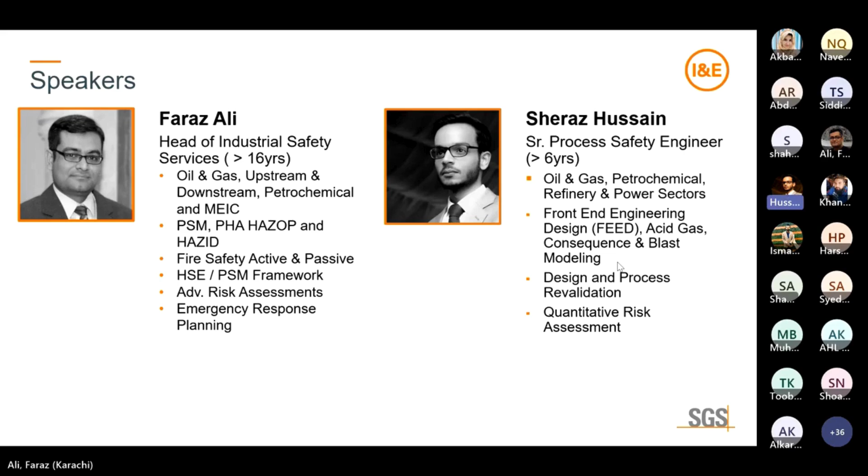Right, so a quick summary of introduction of what we will learn together and how we'll be proceeding. First, as the name expresses, this session is about process safety management. Then we'll cover why we need process safety management within our organization or area of operations. We'll have a quick introduction of process safety management, its relation with international standard ISO 45001, along with key information on some major process safety management systems deployed globally.

Then we'll move onward to one key element of the planning phase, process hazard analysis, which is a key element of the process safety management system. Then we'll quickly go through qualitative, semi-quantitative, and quantitative risk analysis. Before heading to your questions, we'll have quick takeaways from this webinar, and then we'll be available to answer your questions or queries in the chat box.

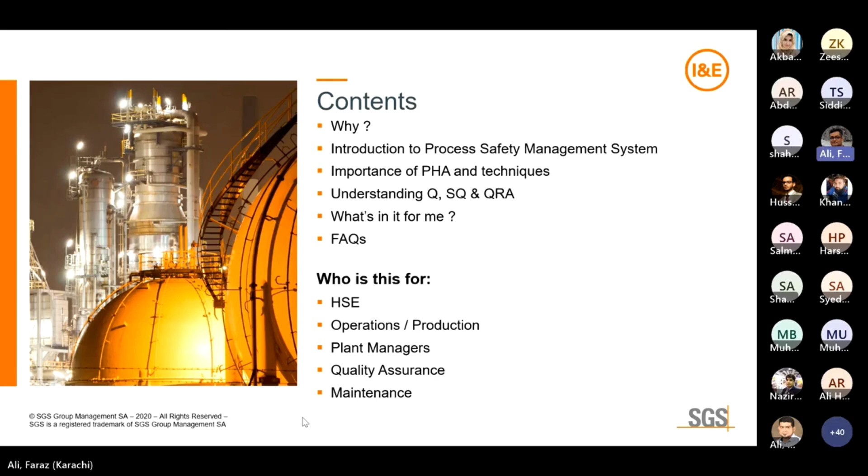So quickly, with a brief start, why do we need a process safety management system within our organizations? Basically, process safety management exists to avoid or mitigate the risk of unexpected release of toxic or hazardous substances, where we either manufacture or store them within our organization. Some key high-level or catastrophic incidents have led organizations to understand and get alert for process safety incidents.

For example, the BP Texas refinery explosion caused around 15 worker deaths, injuring 180 workers, and caused several damages to refinery assets. Some elements of the process safety management system were missing: pre-startup safety review was missing, mechanical integrity was inadequately deployed, consequence modeling was not adequately performed, and unattended audiences were present during the startup of one of the ISOM units. So you can see some key minor elements resulted in a very catastrophic incident.

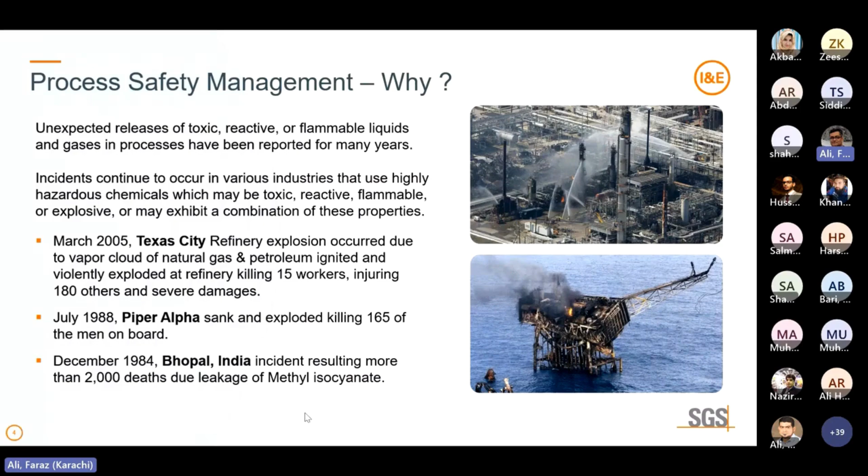Before jumping into process safety, let's have a quick look at what process means to us and how process safety is different from conventional or occupational safety. Process means either we are handling hazardous substances, chemicals, toxic or flammable materials, or cryogenic liquids.

Either we are involved in the storage of such substances, manufacturing them, handling, utilizing, or disposing of them within our operations. These processes are considered part of the process. For the sake of definition, any group of interconnected vessels, or separate vessels located such that highly toxic chemicals could be involved in an unexpected release, follow a single process approach.

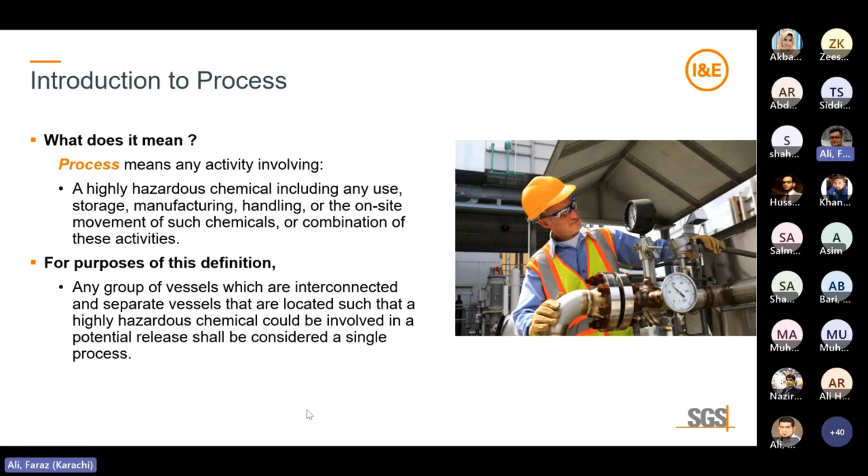So what is the key difference between occupational health and safety and process safety? When we talk about safety, we normally think of the safety of individuals, so personal safety and individual occupational health and safety link together. There is risk of, for example, slips, trips, and falls in every workplace. The key element that differs personal safety from process safety is that personal safety has a high frequency or high likelihood of occurrence, but results in lower severity risks.

Process safety is the blend of engineering and management skills coupled with leadership focus on preventing or mitigating catastrophic risks and near misses, particularly structure collapse, explosions, fire, and toxic release of hazardous substances within scope. Most of the time, process safety incidents are low in frequency, but they result in a high catastrophic result, which may manifest as fire or explosion affecting the nearby community, the people working within the plant, the boiler, or the pressurized vessel containing toxic or hazardous substance.

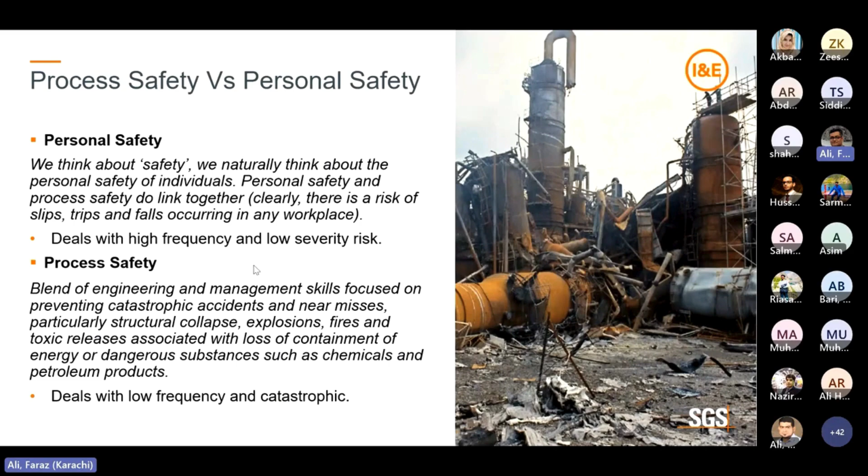When we say hazardous substance, we mean any substance which is toxic, reactive, or flammable. So basically process safety management, or the process safety management system, is applicable to the following key industrial sectors.

Since I have participants from various industrial sectors, process safety management systems are usually applicable to manufacturing industries, specifically chemicals, petroleum refinery, petrochemicals, transportation equipment, and other chemical industries involved in chemical manufacturing, storage, terminals, and depots, etc. Similarly, for fabricated metal products, other affected sectors include natural gas liquids, farm products, warehousing, and so on.

These process safety or safety management systems are also deployed in the electrical power generation and distribution sector, as well as in gas sanitary service and pyrotechnics or explosive manufacturing, where they are involved in manufacturing, storing, or even disposal of hazardous or toxic substances.

One US regulator, OSHA, regulates that organizations specifically dealing with such hazardous or toxic substances around more than 10,000 pounds, almost similar to 4.5 thousand kilograms, must be regulated via OSHA regulations of the process safety management system.

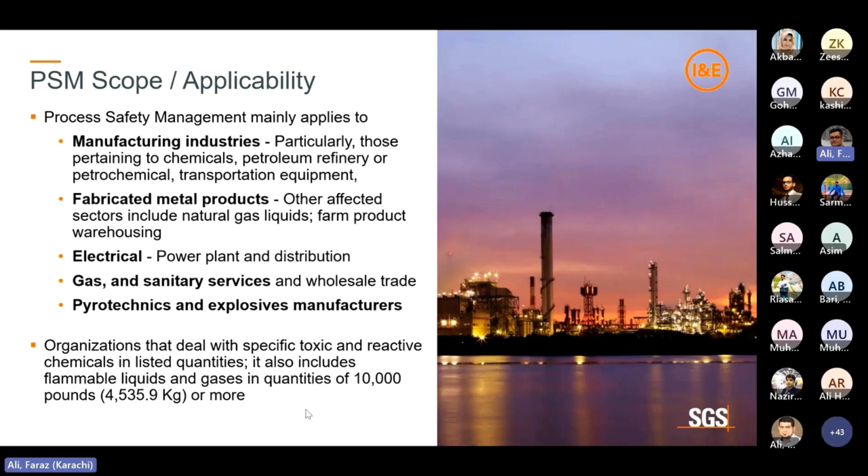So that's all regarding what process safety is, why we need a process safety management system, what a process safety management system is, and whether, as an individual working in any organization, I need process safety management. I've already explained the answer in this slide pack. So let's have a quick look at the key elements of process safety management. How does it look?

Similarly to our conventional occupational health and safety management system, process safety management again begins in a similar way. We will be reviewing these requirements along with ISO 45001, how it compares and how it weighs against ISO 45001's key requirements.

Basically, complying with the Plan-Do-Check-Act approach, this management system starts with process safety information. I'll explain later how these elements proceed, then it proceeds with process hazard analysis, where my colleague Sheraz will explain more in detail, operating procedures as part of the Do stage, hot work permit system, emergency response planning, mechanical integrity, PSSR, training and competency, management of change, incident investigation, contractors, and in the Check-Act stage, compliance audits and management review, etc.

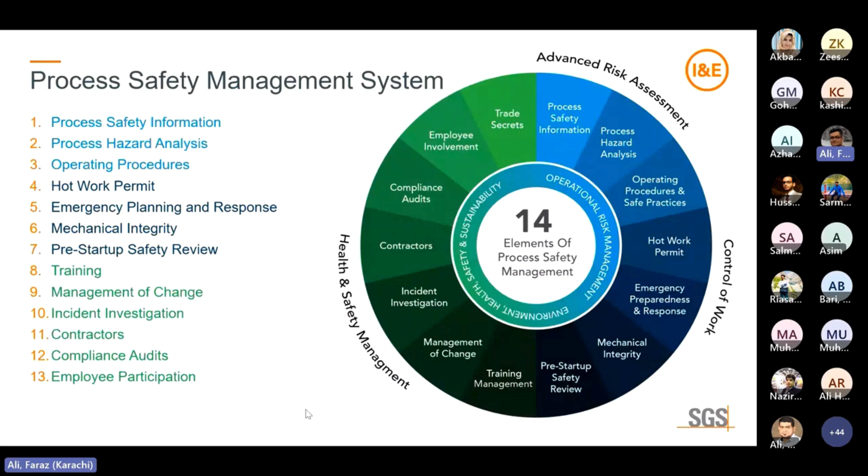By combining operational risk assessment along with environmental health, safety and sustainability, this basically comprises three key elements. Number one is planning, which is a clear statement from management including advanced risk assessment. Another is control of operations and control of work. And the third part is regarding the management system, which complies with continual improvement.

One of the key important process safety management elements, when compared with standard elements, we have, along with DuPont process safety management, which is a well-known and very renowned process safety management system. Most organizations are either deploying it or already part of the DuPont process safety management system. Apart from the difference between standard process safety management systems and DuPont PSM, the key difference is based on 8 elements.

The more complex the process or operation you have, whether in refinery, petrochemical, manufacturing, or a similarly highly hazardous process like an oil terminal or gas pipeline, the key difference in elements becomes important.

Management commitment, integrated organization structure, goal, objective and planning, safety personnel competency, effective communication, management of change, facilities, quality assurance, coupled with mechanical integrity or asset integrity, and the last one, management of change of personnel.

As DuPont has done with standard process safety management, they have split some key elements, for example management of change. With standard process safety management, we have only one management of change process, but with DuPont process safety management, we have three management of change processes. DuPont has split the MOC process into three: facilities, personnel, and processes.

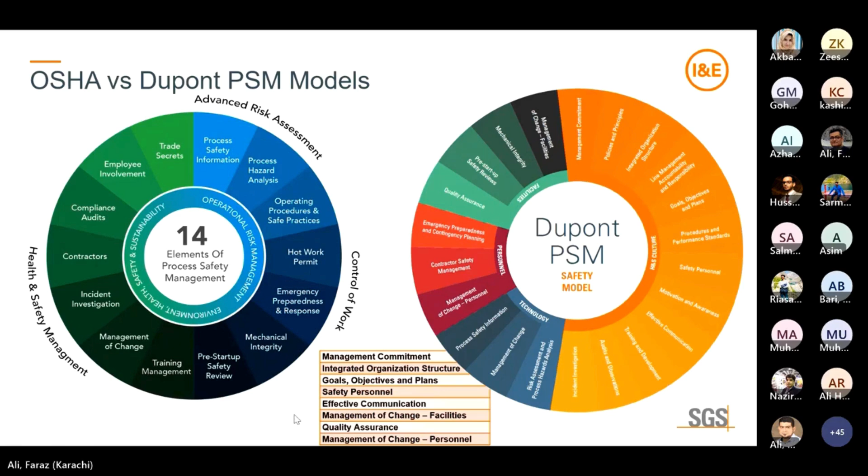Let's have a quick look at the Energy Institute. In European Union countries, there is a high demand or requirement, and they are regulated by Energy Institute requirements for process safety management high level framework.

Along with the same theme of PDCA, they start with process safety leadership, continue with risk identification and assessment, then advanced risk assessment or risk management, and the last one for continual improvement: check, auditing, and understanding the requirement of management system review or management review.

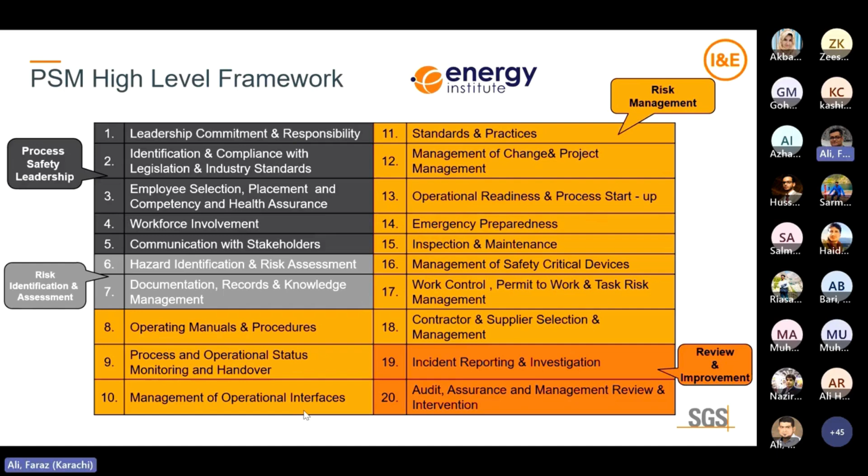So these two are the key high level process safety elements. Let's have a quick look and assess them against the ISO 45001 requirement.

Again following the theme of PDCA, process safety management system demands strong leadership. We have seen this in OSHA, in DuPont PSM, and in Energy Institute. Good leadership is essential before deploying any process safety management, whatever the applicable or regulatory requirement is.

That part is again covered under 45001 leadership and worker participation. As we've seen, worker participation is involved in the OSHA standard as well, and it explicitly explains hazard analysis, which is part of the planning phase, and we'll review in detail.

This planning, or PHA as we normally call it, process hazard analysis, differs across risk assessment techniques categorized under qualitative, semi-quantitative and quantitative risk assessment. Where do I need qualitative risk assessment? Are my existing risk assessments sufficient for my particular process, or do I need further advancement into semi-quantitative or quantitative risk assessment? So basically the process is similar: hazard analysis, quantification of risk, risk mitigation, and then looking for opportunity.

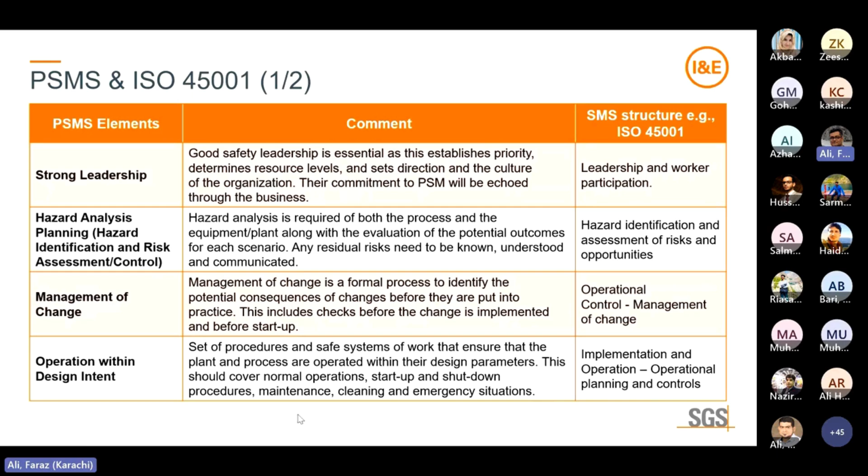Design intent is also part of implementation and operational control if we compare with ISO 45001. So on the extreme left side is the process safety management system elements, and on the extreme right is ISO 45001 key requirements, for an organization that wants a continual improvement system of process safety management.

Competence management, once again, starts with training need analysis coupled with training plans, competency assessment, and then continual improvement for each process plant operator or person involved in operations, maintenance, and research and development.

Control of contractors: we're all aware that most of the work in the process industry is done by contractors. In some organizations, more than 60% of operations or jobs, even during shutdown, are done by contractors. So control of contractors is a key element, and this is also covered under the operations section of procurement in ISO 45001.

Asset integrity planning, risk assessment and control covers the safety critical devices which are responsible for the safety of personnel, plant, and the nearby community. If their failure can result in leakage or spillage of toxic chemicals used, deployed, or produced within our operation, those devices whose failure could result in loss of containment of hazardous substance include relief devices, emergency shutdown systems, alarm systems, or sensors, etc.

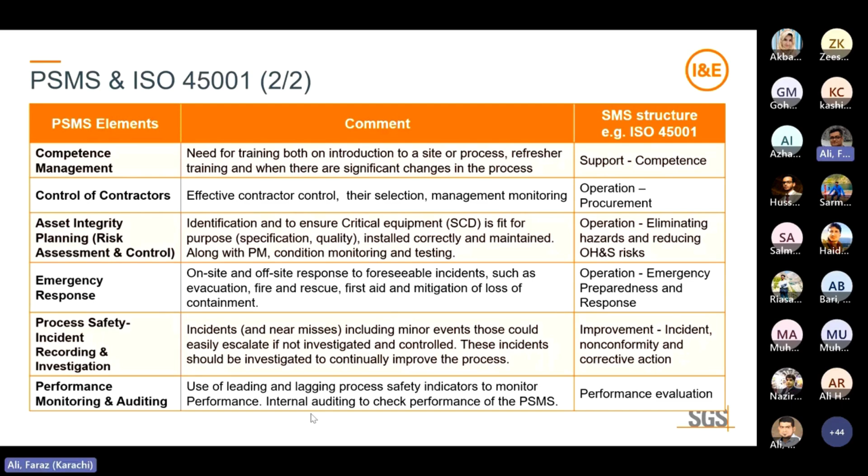As I said, the planning phase requires continual improvement of the whole management system. This is a key requirement of ISO 45001 or any management system, that they need continual improvement within the system. So this is all regarding the process safety management system and ISO 45001.

Here we have 18 different frameworks of process safety management. When we talk about frameworks, basically they are simple elements which are reorganized. Some are coupled, some are split based on the toxicity or based on the complexity of the process.

For example, if we talk about any terminal whose key operations are to perform filling of tanks and then decanting with the help of lorries, and the toxic or flammable fluid is transported via tank lorry, the operation is quite simple. There is no chemical reaction involved. Simply filling and decanting of tank, and then transportation of these toxics may require simpler process safety management.

Compared to any organization responsible for chemical manufacturing, for example polyvinyl chloride (PVC), or polyethylene terephthalate (PET), and similarly other complex refinery operations where we have certain isom units, for example hydrocrackers and other lighter hydrocarbon refineries.

One of the highlighted ones with the orange color are the key well-known process safety management systems. For example, 14 elements of OSHA, 20 elements of Energy Institute, similarly 12 elements of Chevron, and the earlier 14 elements were also adopted by Dupont, usually named process safety and risk management. Later on, Dupont further conducted advancement in its elements, and now they have become 22 elements.

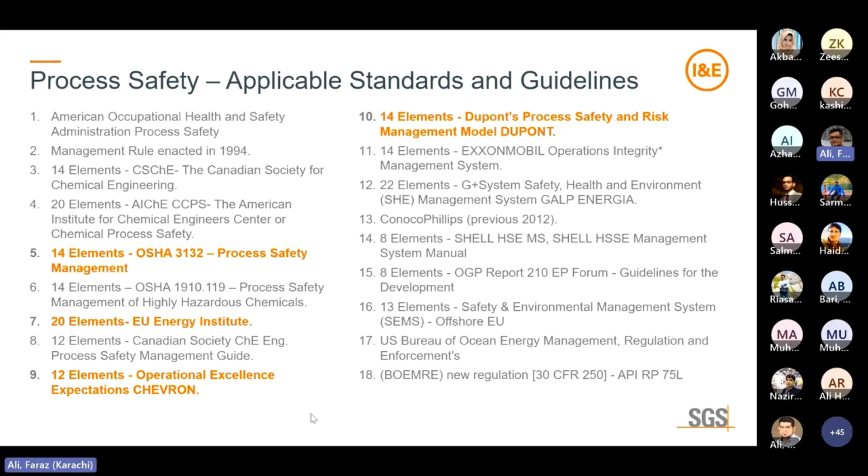Let's talk about PHA, the second element of process hazard analysis, which is part of the key activity, part of the planning phase of any process safety management system. So what is PHA? It is a thorough, orderly, systematic approach to identify what hazards are associated with the plant and how these hazards are evaluated with frequency or likelihood, and after conversion into risk, then evaluating risk and deploying key measures to mitigate those risks.

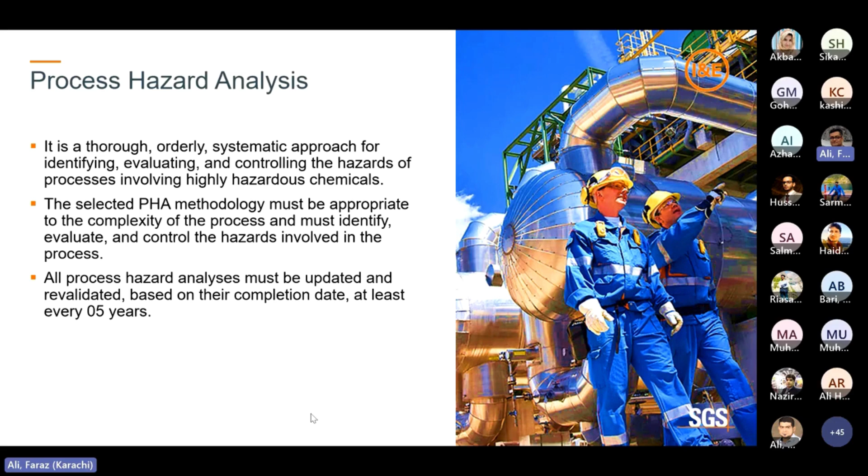Some of the key techniques deployed as part of PHA: number one, and the simplest one, is what-if analysis, hazard identification or risk register development during the design phase; HAZOP study during design, during operational phase, or during any key level management of change; failure mode and effect analysis of packaged units, similarly fault tree analysis or any other appropriate equivalent methodology, for example event tree analysis.

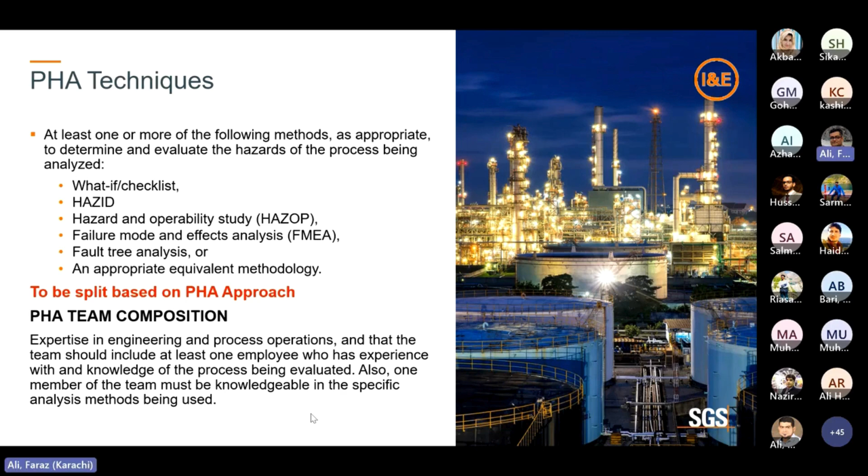So basically, how the PHA team is comprised and how it is done by the team: the PHA team normally comprises process engineers, design engineers, operation and maintenance staff, along with an independent person who does not have any sort of business or financial stake with the organization. This gives any organization an edge to truly identify the hazard, truly evaluate the risk, and provide guidance on how the risk can be mitigated and the operation or process can be made safe.

So, risk assessment approach.

The risk assessment is normally split into types. Normally the risk assessment deployed in our offices is called qualitative risk assessment, because our operations are a bit simple and they do not have any complex reaction or higher hydrocarbons or toxic chemicals within our operation.

So the risk methodology usually involves a good decision maker. For example, for qualitative risk assessment, we normally identify the frequency of the hazard identified, evaluate it against certain severity, and categorize it into low, medium, high. Then we start deploying our controls, and reevaluate what our existing risk is and what our future plans or roadmap are.

To further mitigate risk, similarly for semi-quantitative we go further to extend what the higher risks are and to what extent they can harm our people or the group of people involved in such processes. And for quantitative risk assessment...

The answer is when we have certain complex processes, the level of estimated risk again coupled with its proximity to the limit of tolerability. Similarly, the higher the complexity of the process, the higher the quantification we need to conduct for that risk assessment. Like in our offices, where we are surrounded by lower potential risk, we normally conduct a qualitative risk assessment. But when we talk about refineries and petrochemical plants involved in manufacturing or production of hydrocarbons, toxic chemicals, and hazardous substances, we usually deploy higher risk or extreme quantitative risk assessment.

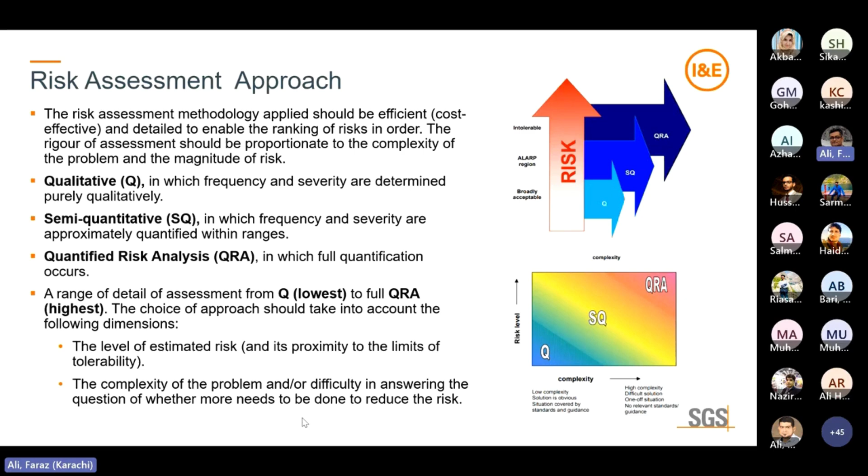So before I hand over the floor to my colleague Sheraz, he will be explaining in more detail some of the key techniques of PHA which are normally deployed to mitigate those risks within the area of operations. Thank you, Shiraz.

Thank you so much, Mr. Faraz. As you guys are aware of the potential workplace hazards and their consequences of causing injuries, deaths, and financial losses, a safety plan shall be developed and deployed by understanding the hazards and their consequences to the plant. For that purpose, we have several techniques, as my fellow has explained.

Let's start with HAZID. A HAZID is a common structured technique which identifies hazards at an early stage of the project. Hazards may relate to process or non-process sides, including manual handling of chemicals, transportation, as well as process hazards including the release of toxic chemicals, flammable gases, explosions, etc.

The main benefit of HAZID is that it identifies and gives a clear picture to management for the decisions to be taken for risk mitigation, and that ensures that our project overall will ensure employees' safety. Moving on to the next slide, HAZOP.

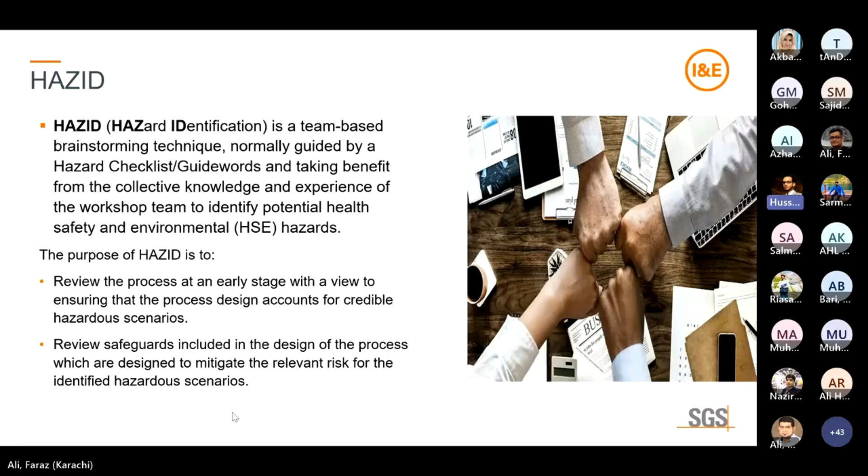In place, when we have done hazard identification and identified different risks, those risks are basically considered in HAZOP. HAZOP is particularly focused on identifying and evaluating the hazards related to the process and operability of a plant, and it's also a structured approach.

The goal is to identify and deploy appropriate safeguards, or first to evaluate what safeguards are available, and to deploy certain measures that are feasible and will reduce the risk to an acceptable level.

It's basically performed using guide words, which enable a multidisciplinary team ranging from the process side, the mechanical side, and the operational side. They are guided by guide words which take into account the parameters and the deviation from normal operation, and this enables the team to move in a focused direction and question rigorously for hazards that may happen, and to assess the plant's safety and evaluate its safeguards.

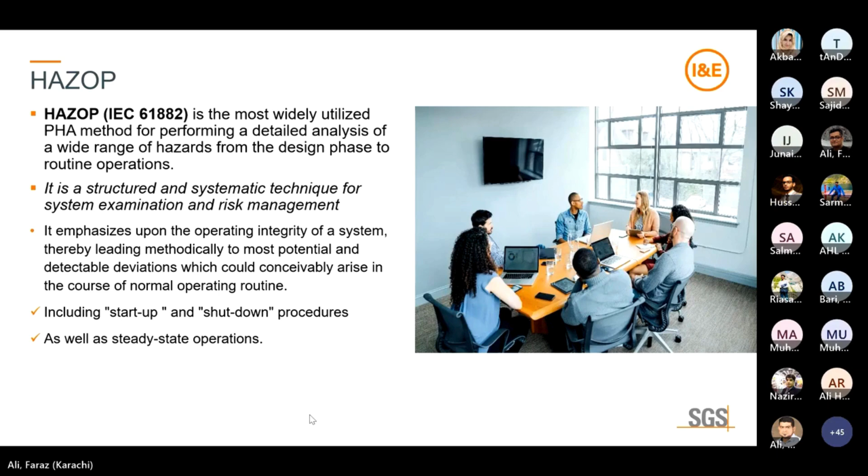Moving on to the next slide, SIL. The SIL assessment basically results from the risk or high severity risk identified in the HAZOP study that needs to be catered to, and the SIL study is performed after the HAZOP.

First, we perform HAZID, then HAZOP, and then we perform the SIL study. The SIL study consists of the same multidisciplinary team, but they provide more focused and more detailed inputs on certain hazards.

We basically perform the SIL study using the LOPA analysis, layer of protection analysis. In 9 steps, we assess the process, and if that process isn't inherently protected, which we all know that no process is inherently protected.

We gradually deploy certain measures, ranging from basic process control system, and if that's also not enough, we deploy alarm and operator intervention. If that's not enough, we go to safety instrumented system, which basically cuts off the hazard. If that's still not reducing the risk to an acceptable as low as reasonably practical level, we move on to physical protection, relief devices, and then to physical containment, bunds or vessels or scrubbers, etc.

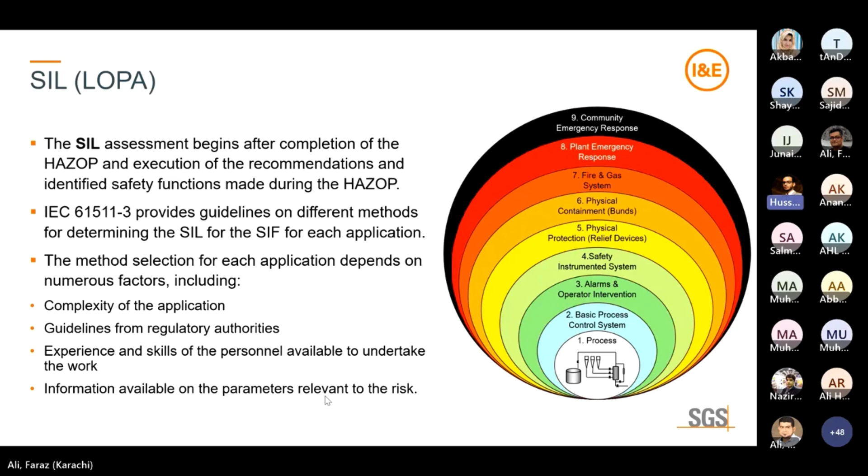So moving on to the next slide. QRA, as my fellow colleague has explained, stands for quantitative risk analysis.

In qualitative risk analysis, we evaluate what the risks are and identify their frequencies. However, qualitative risk analysis doesn't give an idea of the extent of damage in numbers, which quantitative risk assessment does.

So for a layman or normal operation engineers, qualitative risk analysis is enough. But for management to deploy a safety system, they need to know the extent to which the consequence of a hazard could result in. For that purpose, a QRA analysis is performed, which basically involves consequence modeling.

It basically estimates fatalities, which can be individual, group, or societal. It also predicts economic losses, related to the loss of product, loss of human lives, and damage to the environment. It helps in deploying a safety system, which may result in reduction of that hazard.

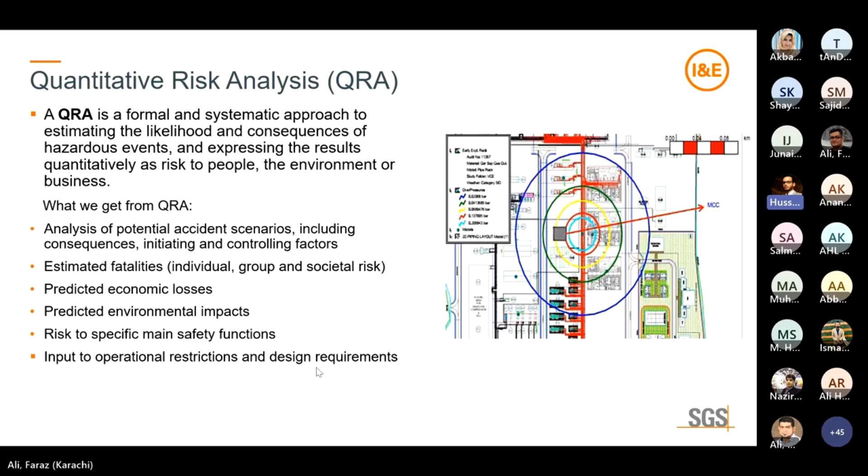So for that whole purpose, a QRA is a detailed study performed as a desktop job as well, and that is essential to visualize the extent of the damage. For consequent QRA, I'm sure you guys have an idea about QRA. Let's move on to consequence modeling.

Consequence modeling is basically a sub-step of a QRA, in which we determine the amount of hazardous material release. We perform consequence modeling to determine what hazard can occur in our plant.

In a normal operating plant, what hazard can occur from any flange, any leak from any flange, any vessel, a rupture from a tank, and a fire resulting in a pool of leaked crude. For that purpose, the amount of fire radiation, the amount of gas plume, and the toxic chemical intensity is determined by consequence modeling.

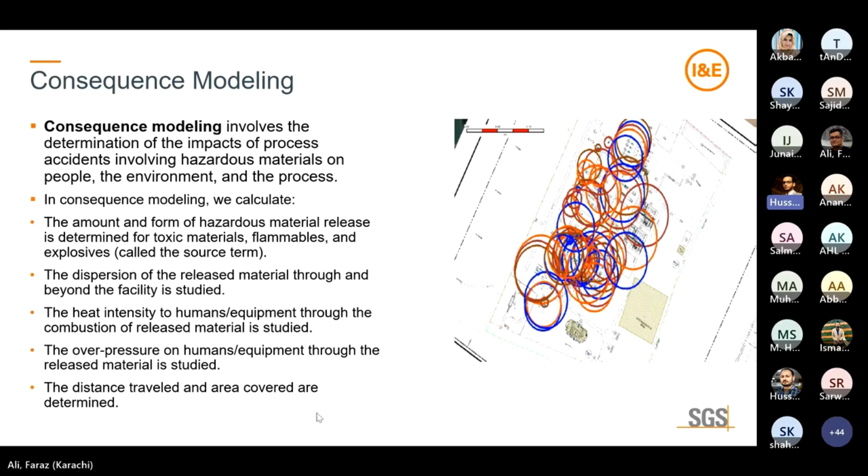It's performed on specialized software, and the dispersion of the released chemical, its extent and height, is evaluated through consequence modeling. Similarly, we can also assess the overpressure on humans and equipment by blast modeling, which is also a step in consequence modeling, and the distance and travel area required for safe operation. This whole consequence modeling helps us identify or deploy certain measures for evaluation of the risk to a building or control room of a plant.

Let's say we are in the stage of building a plot plan for a plant. We need to perform consequence modeling, which may give us a number that is the severity of the risk, and which will be the deciding factor for the design of a control room and its severity.

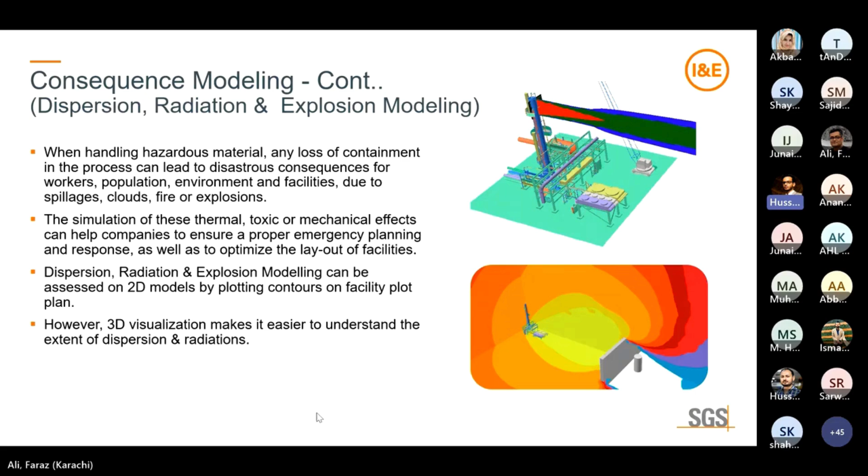So for consequence modeling, there are two things which can be done. We can perform consequence modeling on a 2D scale, resulting in a 2D plot plan or side view. However, we can also perform consequence modeling on 3D plot plans or 3D software, which will result in 3D imaging of those consequences.

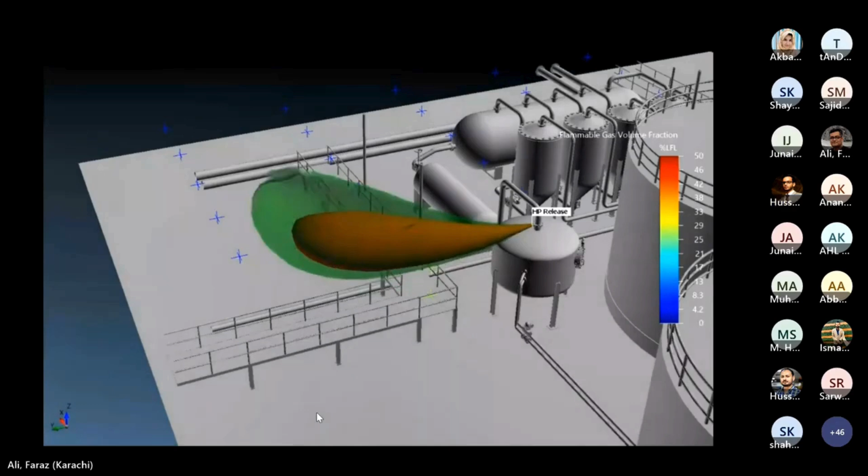The main purpose of 3D imaging is that it helps in visualizing the intensity or the extent of the damage. For example, the video displaying in front of you shows the release of a gas. The LEL of the gas plume can be easily visualized by a 3D plot plan, by a 3D consequence model, and you can easily relate to the extent of the damage. However, a 2D plan doesn't help in easy visualizing of the damage. So here comes the role of the 3D plan, where we can basically understand the real extent of the damage.

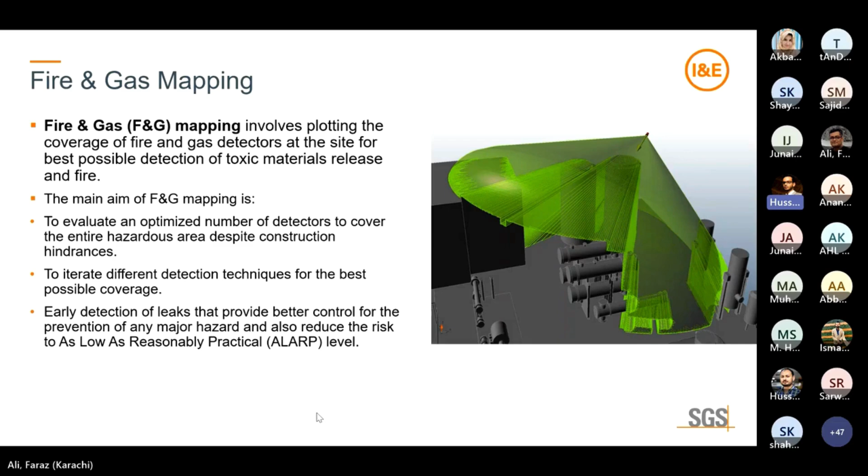Moving on to the next, F&G mapping. What is F&G mapping? Let's say we have a plant and there is a potential for a gas leakage or a fire hazard. We need to evaluate it at the source and take measures so that the risk is mitigated at its source and not after its propagation. For that, we deploy fire and gas detectors. But to evaluate the optimum number of fire and gas detectors, we have to perform its mapping first. That 3D mapping helps us in the overlapping of the detectors' coverage and helps in determining the optimum number of detectors, which is performed in the live 3D model of that certain plant. So that's where F&G mapping helps.

Moving on to the fire and explosion risk assessment, as its name implies, it's basically quantifying the fire and explosion accidental events and their consequences. Its main objective is related to consequence modeling and QRA, to determine the extent of the damage and to take certain measures which may result in the safe operation of the plant, the workers, and the environment. So we can design the layout of the plant accordingly if we are aware of the hazards that may result from fire and explosion. That's the prime purpose of this fire and explosion risk assessment, which is also called FERA.

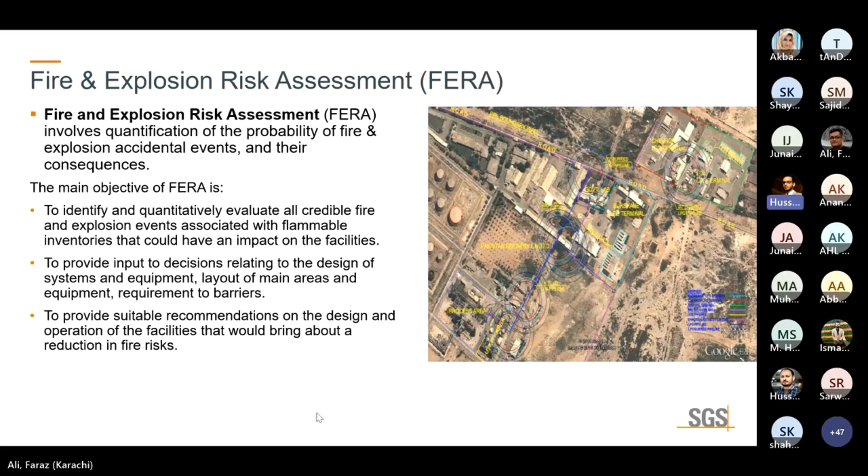So moving on to the next slide, I think that's enough. Mr. Faraz, will you take over this from here.

Okay, okay, no problem. So, what's in it for me? As you all have discussed about this stuff and attended, I'm sure you guys are aware of the process safety framework, how it works, its deployment solutions, what is a hazard, HAZOP, QRA, FERA, dispersion radiation modeling, and what is safety auditing, PSM auditing, and its training.